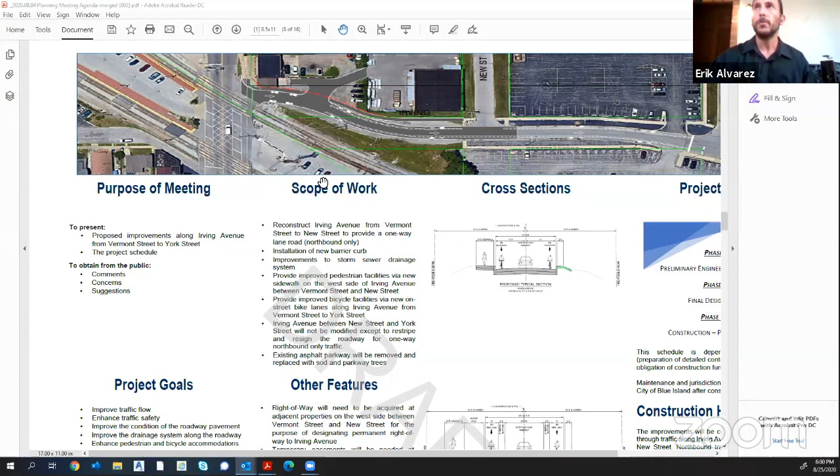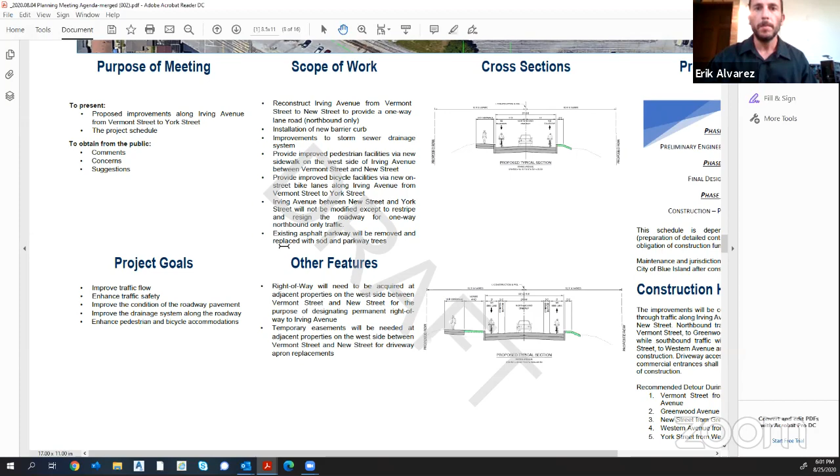This is an electronic meeting due to the COVID-19 crisis, so we've extended the comment period 5 days after this meeting to allow anybody who has questions to email the clerk, Randy Heuser, and we will answer any questions or address any comments sent within 5 days. So I'm going to run through the scope of the work and the goals of the project, one at a time. Again, if there's any questions or comments, they can be emailed to Randy Heuser within 5 days after this meeting.

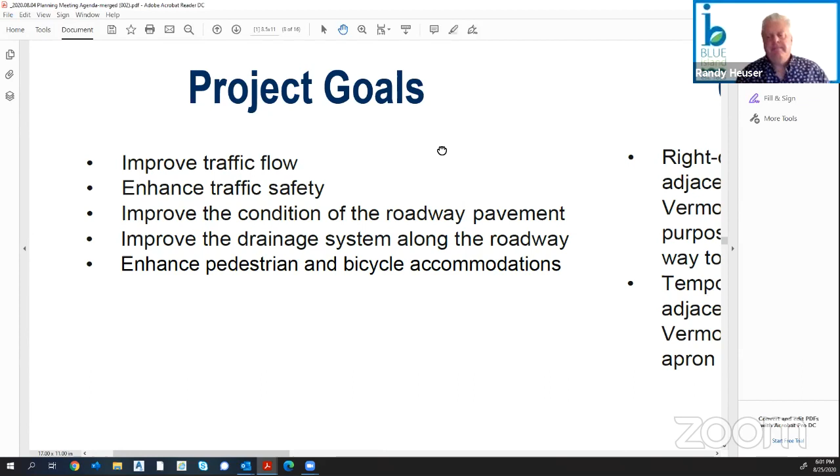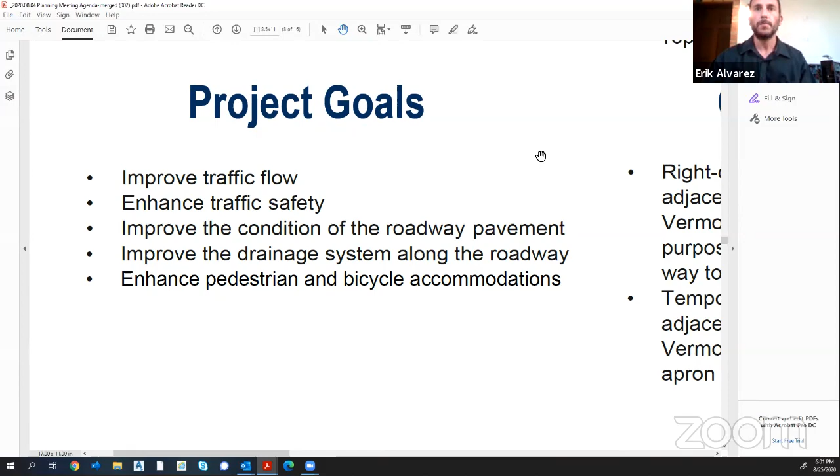So the goals of the project are, can you all see my screen share okay, Randy? Yeah. Okay, great, thanks. The goals of the project are to improve traffic flow, to enhance safety especially at the intersection, to improve the condition of the roadway pavement, which is heavily deteriorated, and enhance pedestrian and bicycle safety due to the lack of sidewalk and/or any bicycle lanes on Irving Avenue right next to the Metra.

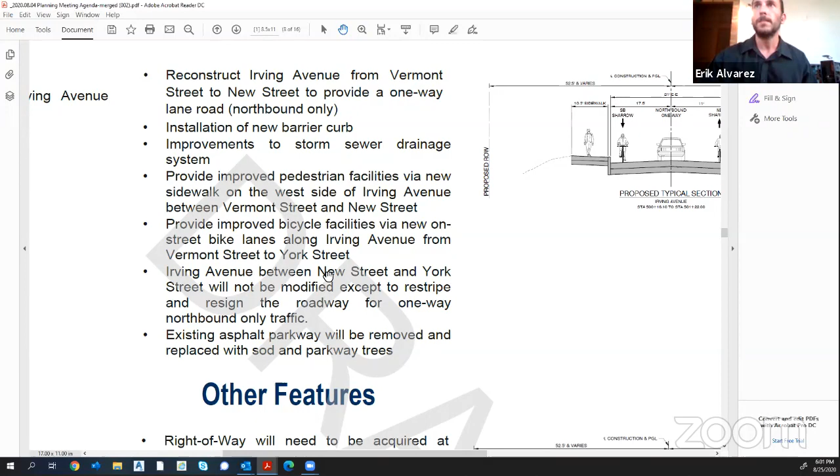The scope of the work is to reconstruct Irving Avenue from Vermont Street to New Street and provide a one-way road, northbound only. The reason for the one-way road is due to the narrow intersection at Vermont Street and the need to fit both a roadway and a sidewalk there. We'll be installing new curb, new sidewalk, new bicycle facilities, including shared lanes and dedicated bike lanes where the width allows. That's between Vermont Street and New Street.

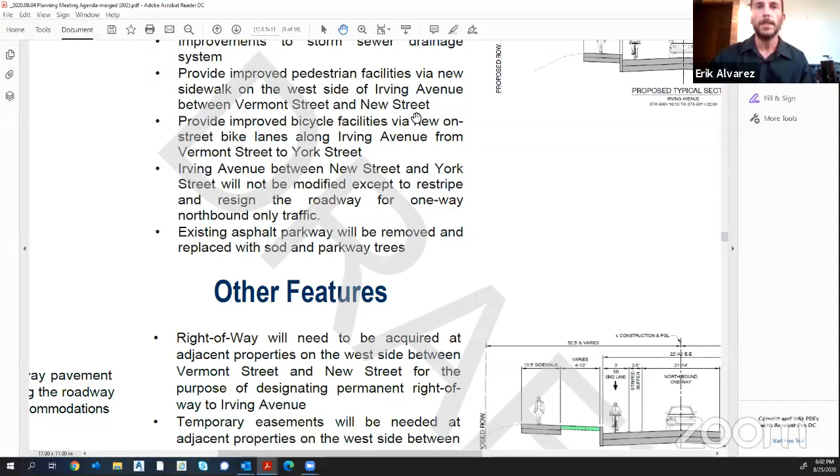In between New Street and York Street, we'll be doing parkway improvements to remove the asphalt parkways, landscape and beautify them with new trees, and we'll be restriping it for one-way northbound.

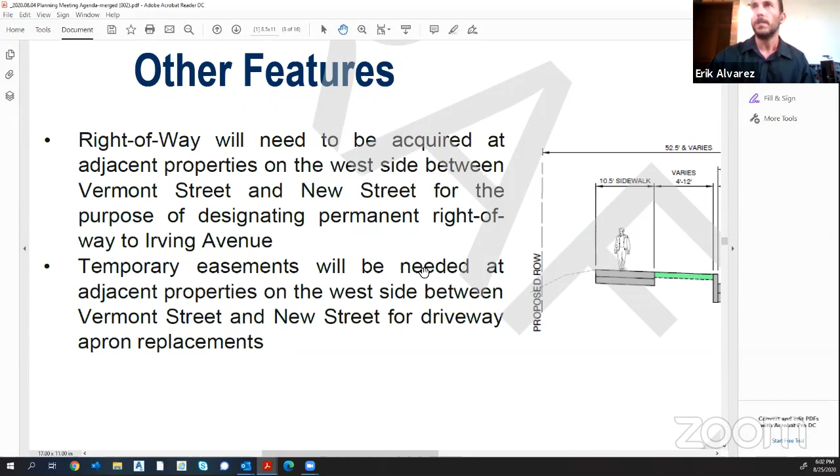For this project, right-of-way, that is property acquisition, will need to be acquired at adjacent properties on the west side between Vermont Street and New Street. Further on in this presentation, I'll show an aerial view with the expected right-of-way and property needs for the project. Again, any comments can be emailed to the clerk after the meeting. Temporary easements, that's temporary property acquisition, will also be needed to construct the project on the west side between Vermont Street and New Street for driveway replacements.

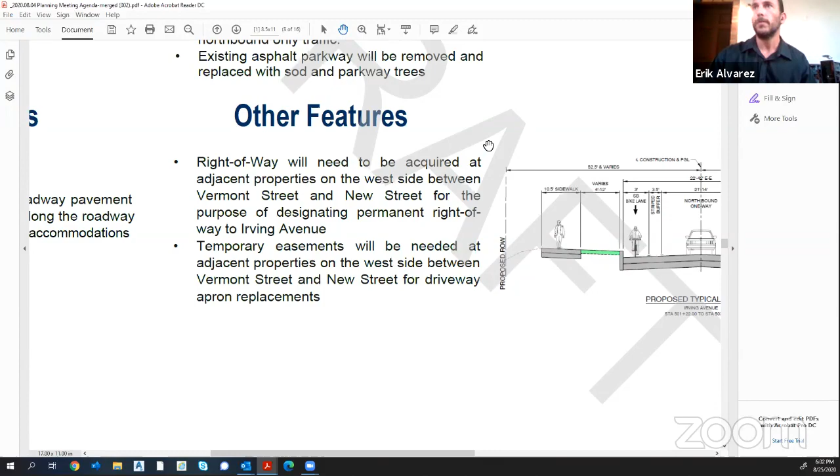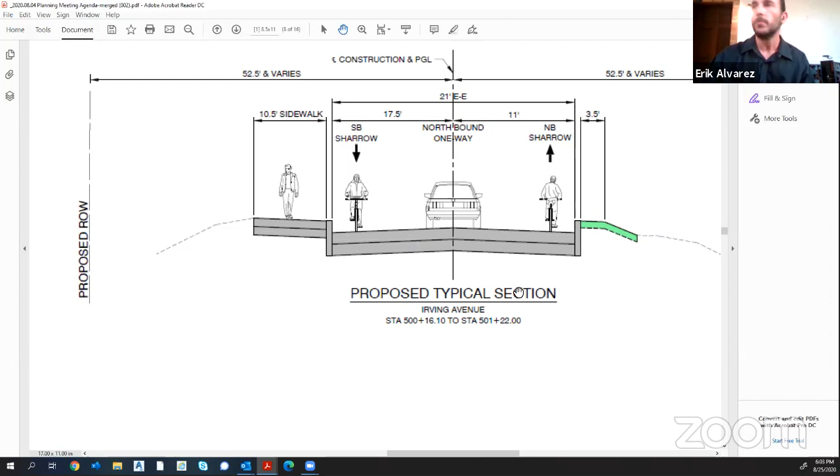I'm going to quickly go through what the new roadway is going to look like. We have one-way northbound traffic. We have southbound and northbound bike lanes or shared lanes, depending on the width of the roadway. And then we'll have a sidewalk on the west side, which will connect, whereas previously it's unconnected between New Street and Vermont Street.

North of that section, we'll have a little bit more parkway, but the setup's essentially the same with bike lanes, northbound traffic, and a sidewalk with a little bit of a parkway here because the width is wider.

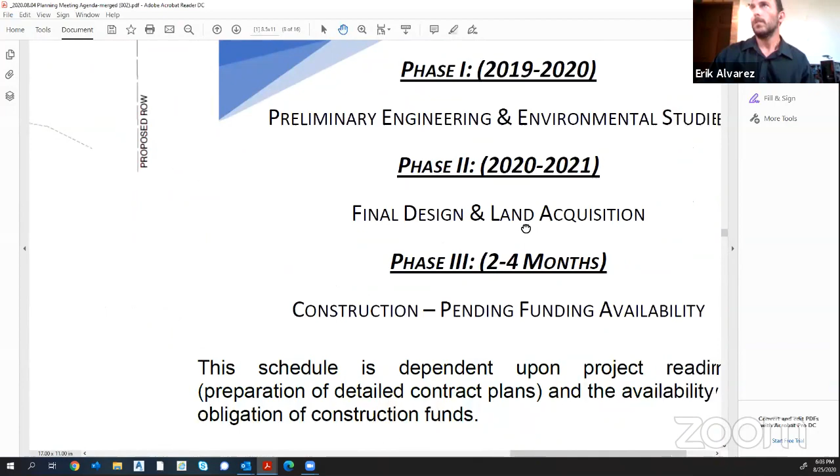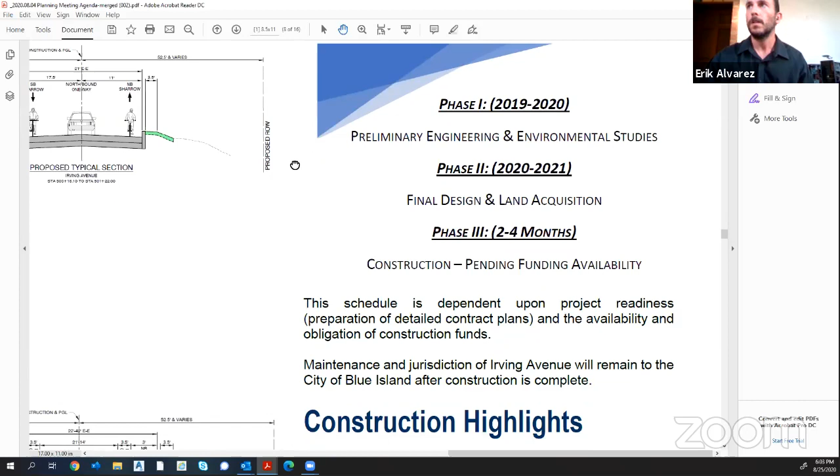The project schedule, this is a federal project, so the schedules can be fairly drawn out, and this is an estimate as this project requires right-of-way or property acquisition. These are estimates only, but we'd be hoping to finish phase 1 this year, phase 2 next year, and phase 3, which is construction, will take between 2 and 4 months. So the schedule heavily depends on the acquisition of the property and concurrence from the Illinois Department of Transportation.

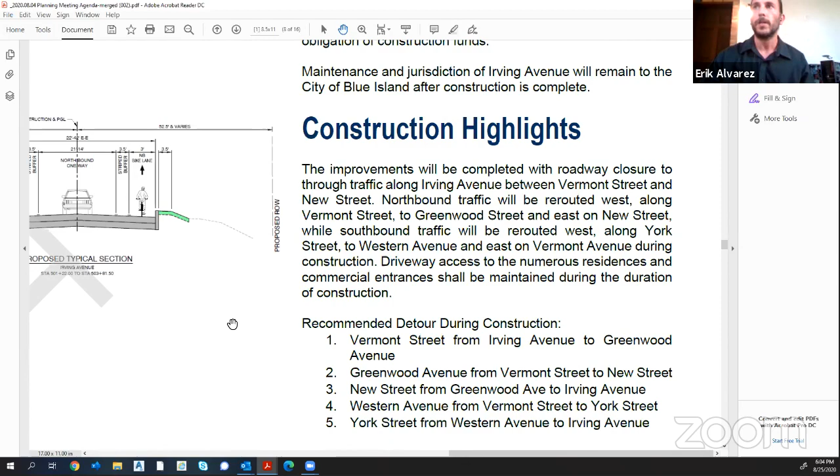So the goals of the project will be to reconstruct Irving Avenue. One of the things we wanted to point out is there will be a detour in place during construction because of the narrow width of the roadway. The road is expected to be completely closed during construction, I'll show you the map of the detour later, and that will get further reviewed by IDOT as the project goes along.

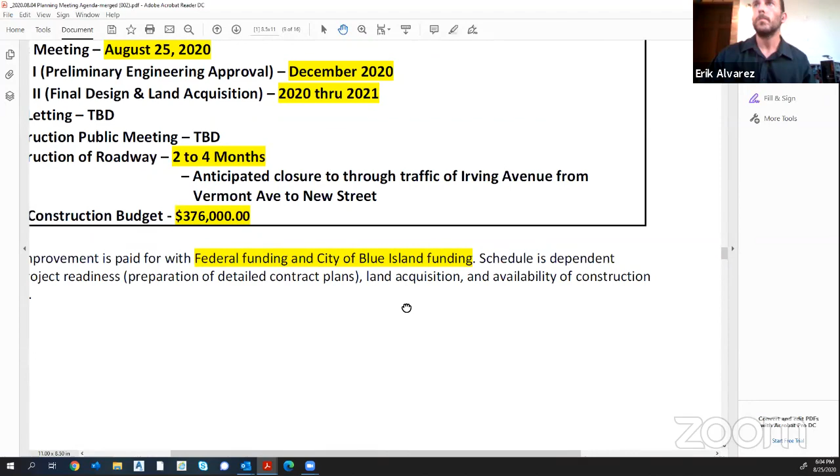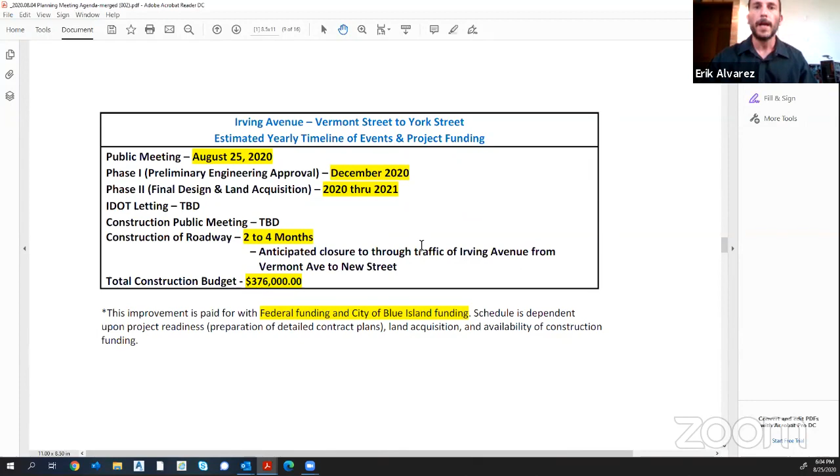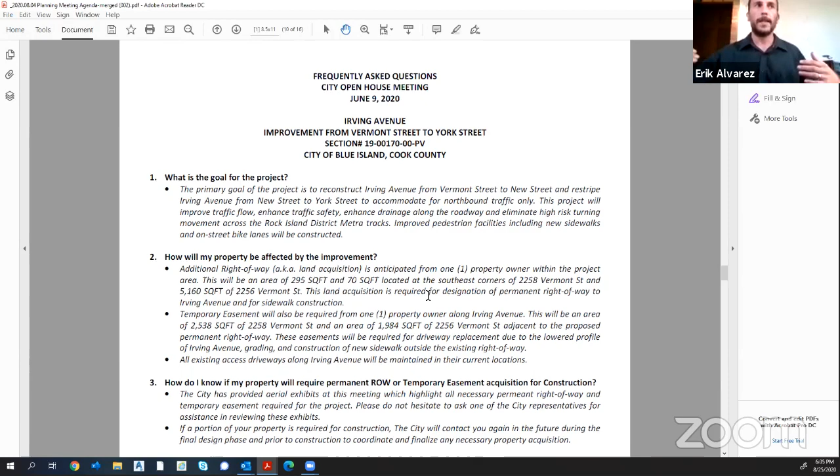Some frequently asked questions. The goal of the project is to reconstruct Irving Avenue between Vermont Street and New Street. Basically, we're trying to make the intersection safer. There's some issues with the gates. Southbound traffic can approach on Irving Avenue and not even encounter any gates before the Metro track crossings, and we're trying to eliminate that movement to make it safer for motorists and pedestrians too, because currently there's no bicycle or pedestrian facilities, which forces people out onto the road at the intersection right next to the train station.

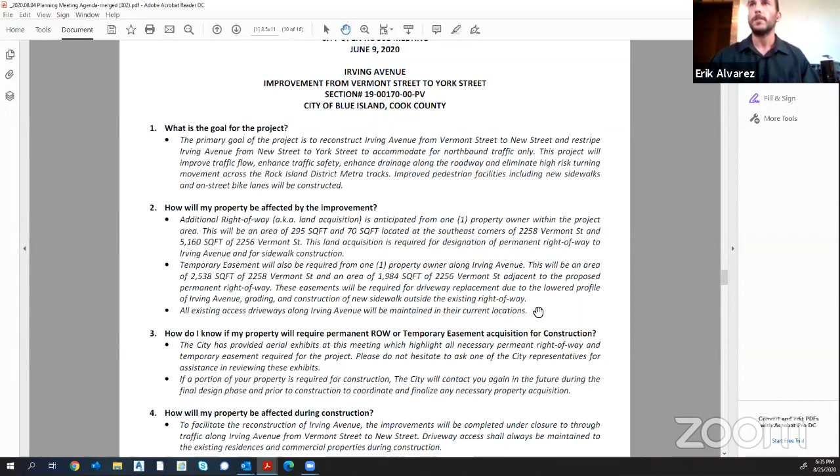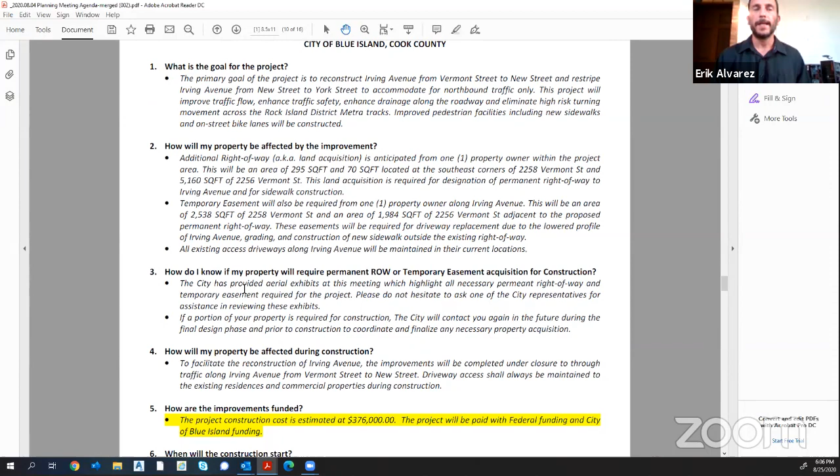Next question: how will my property be affected by the improvement? We're expecting property to be needed on the west side for construction and for permanent facilities, so for the sidewalk, basically on the west side. This isn't expected to have any real impact on any of the structures, but property will be required to be bought for this project. Okay, so we're going to go through aerial exhibits.

How will I know if my property will require any permanent right-of-way or temporary easement for construction? We'll go through some aerial exhibits later, and you'll see the affected properties. We also did mailings through Robinson Engineering and the clerk's office to all the affected property owners and all the affected agencies, as this is right next to the Metra tracks. So all the affected property owners should have got a letter in the mail already with all of these details, but we'll also show you them later here.

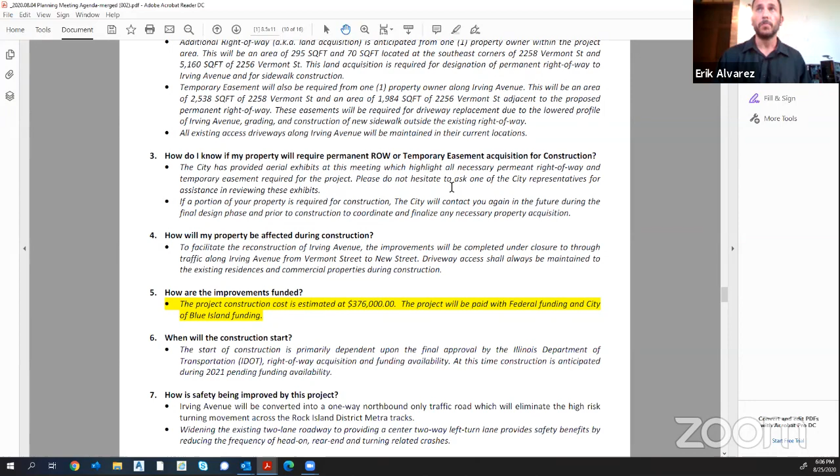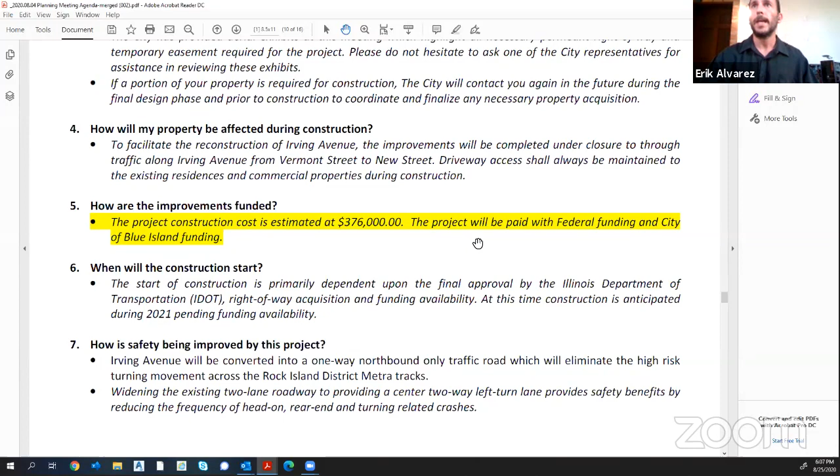These improvements, as we spoke of before, the construction cost is expected to be around $376,000. The project will be paid for with Federal Highway Administration funding, RTA funding, and City of Blue Island funding. Construction timing will be starting depending on the approval of engineering phase 1 and phase 2. So we're hoping for construction following phase 1 in 2021, 2022.

How is safety being improved in this project? Number one, we're trying to eliminate the crossing movements across the Metro tracks that are not currently protected by any gates. Number two, we're trying to improve safety for pedestrians by providing them a dedicated sidewalk and bike lanes and/or shared lanes, so they have a dedicated area right next to this train station too.

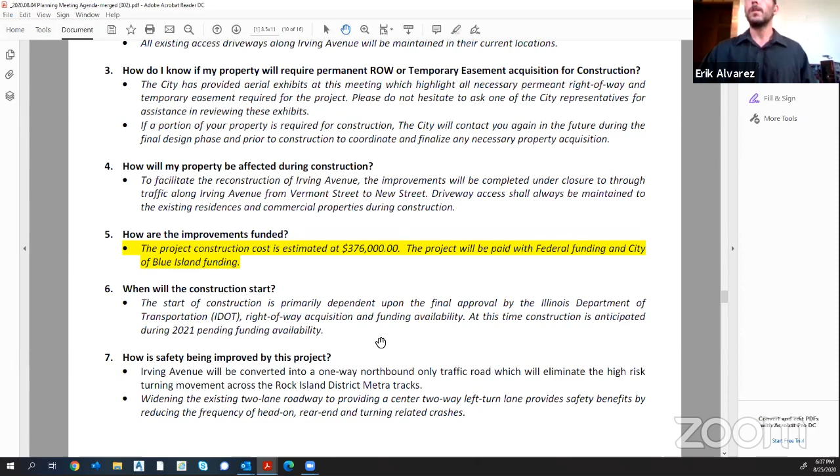Why are on-street bike lanes proposed along Irving Avenue instead of a separate shared use path? By shared use path, we're talking about a wider asphalt bike path that people may have seen along the Cal-Sag Trail recently constructed, or along Canal Street, just south of the Cal-Sag Channel. The reason why we're doing bike lanes here is basically because of available space. Anybody familiar with the area will know that it's a very narrow roadway, especially right at the intersection of Vermont Street and Irving.

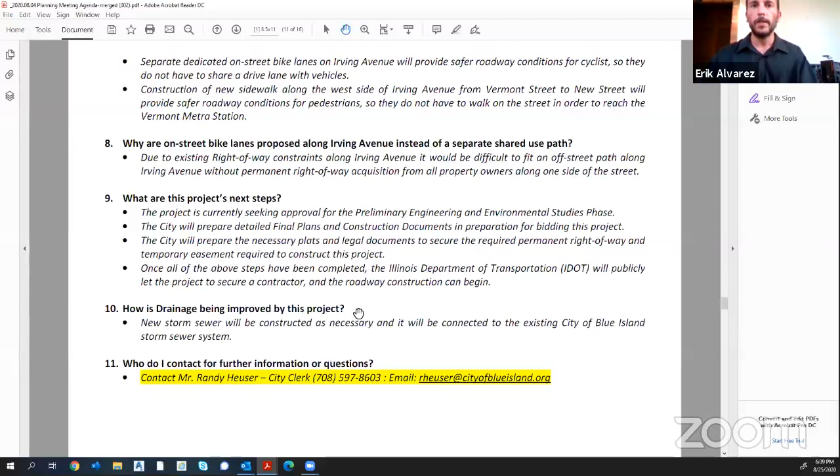What are the next steps? This meeting is one of our prerequisites for getting phase 1 design approval from the Illinois Department of Transportation, so we're seeking approval for preliminary engineering and environmental studies. We'll be preparing a set of detailed plans and construction plans during phase 2, and then we'll be preparing with the city's real estate attorneys the plats of highways and all the legal property documentation needed to acquire the properties needed for the project.

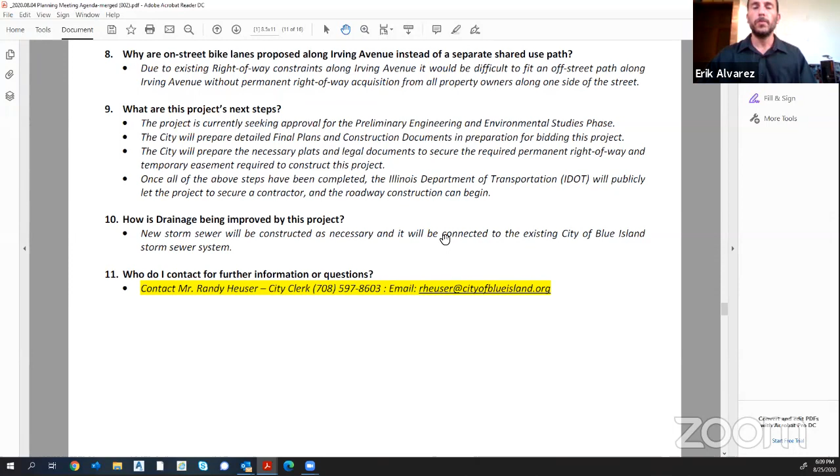Drainage will be improved by the project, number one, by constructing new storm sewer, and number two, by constructing curb and gutter. If you're familiar with the roadway, it currently just has aggregate shoulders, so stone shoulders, but we're going to upgrade that to concrete curb and gutter.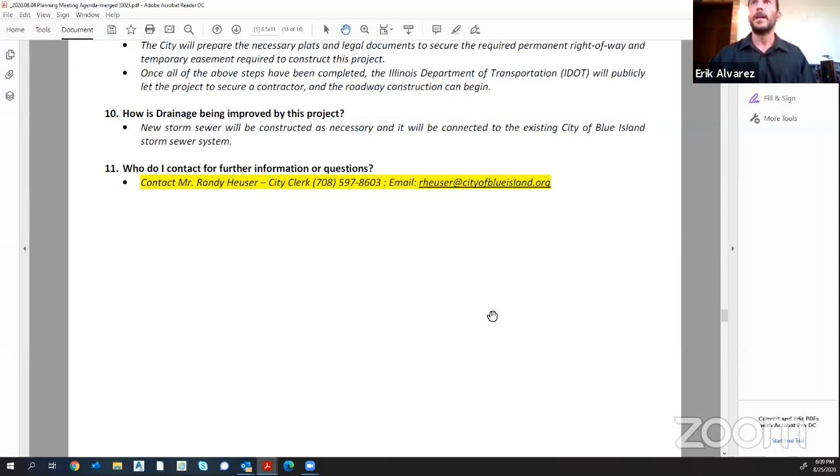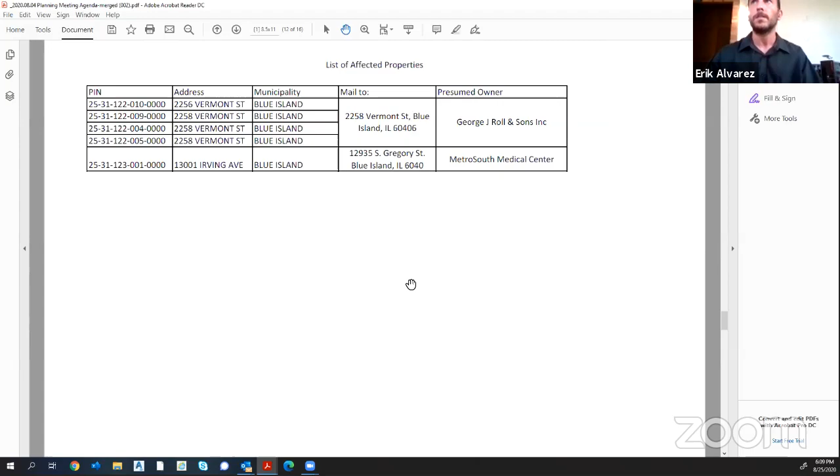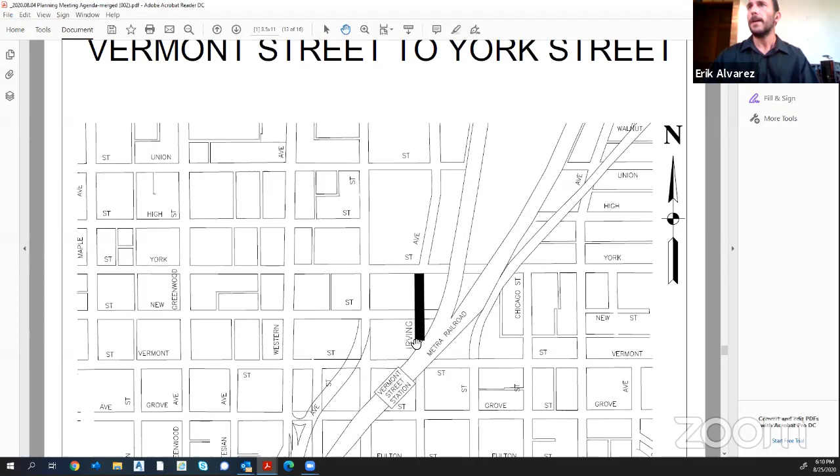This is just a location map of the project. We have the Metra Railroad to the south, the Vermont Street Station. This is Irving Avenue, Vermont Street, New Street, and York Street. So, location of the project.

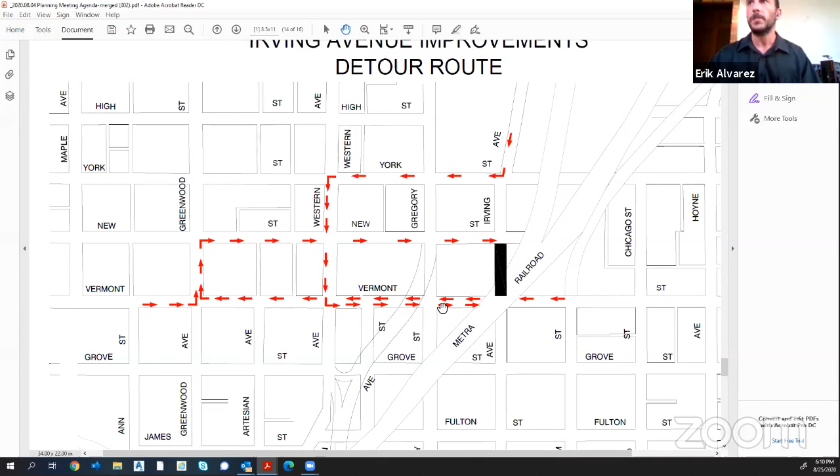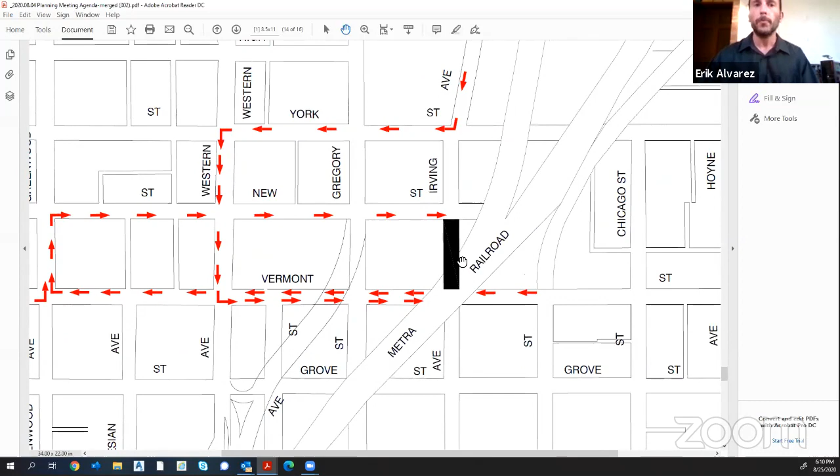This is the detour route. I'm not going to go into it in great detail here. This still gets subject to IDOT approval during phase 2: number one, to approve all the signage and details of the detour route, and number two, because during phase 2 they'll make sure this is coordinated with any adjacent construction. For example, if this were to happen this year, they would want to coordinate with the Western Avenue Bridge replacement. But the main takeaway is that the roadway is expected to be closed during construction due to the narrow width.

You see there's one-way northbound traffic, and shared bike lanes at the narrow intersection. We have a crosswalk here for pedestrians, and a connected sidewalk running on the west side of Irving Avenue. Once the width allows, we will have dedicated bike lanes as well.

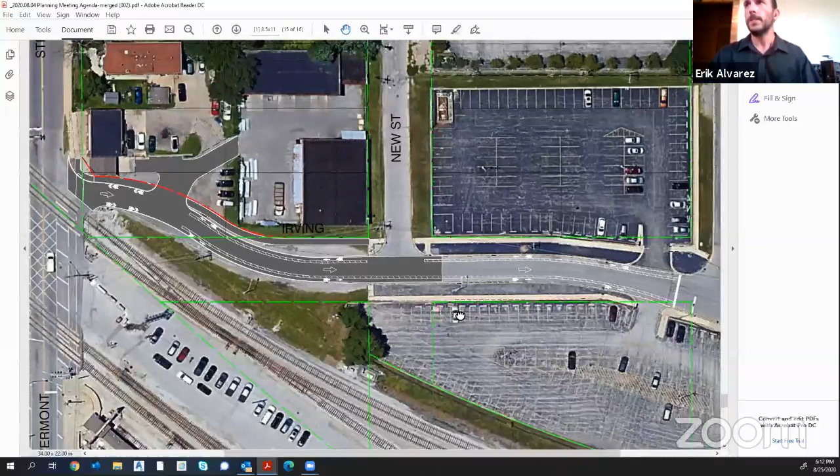As detailed in this pavement exhibit, the reconstruction is going to stop just north of New Street, where the roadway is in much better shape, and it will just be a matter of restriping to allow one-way traffic and bike lanes to York Street. All the signage will be changed along York Street to show that you can't turn southbound onto Irving, and everything will get restriped at the intersection.

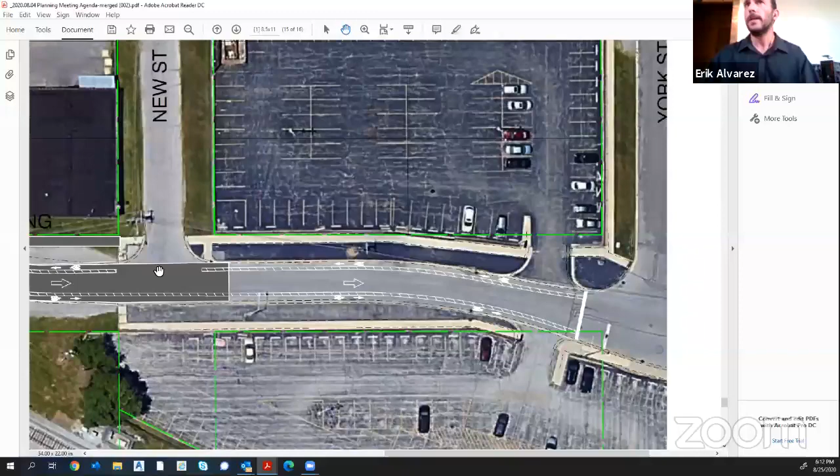These asphalt parkways will be torn out, landscaped, and trees planted to add to the appeal of the area, including the no man's land here, what's gravel shoulder now.

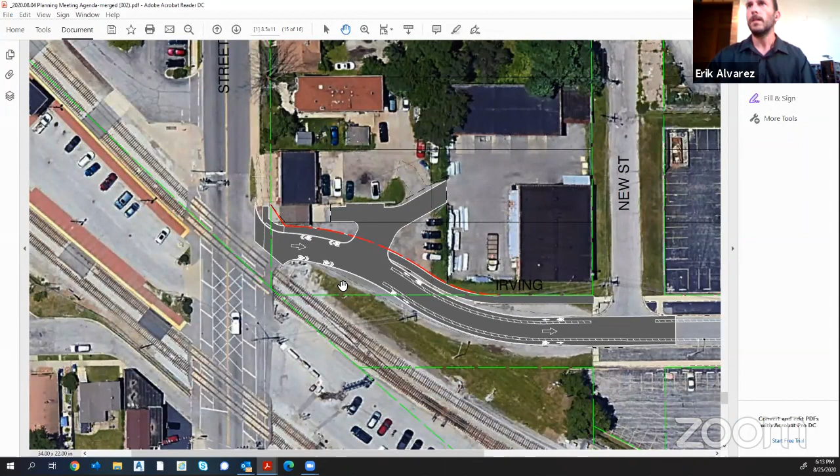I want to make sure I show everybody here what we're looking at now - these green lines are the property lines for the roadway. Irving Avenue, which used to be called Wabash Street, I believe, used to run directly east and west. This swoop, this set of double curves that brings the roadway to the west, is a newer addition. Survey records don't actually indicate that this was ever dedicated for a highway. So if we cannot find the survey records, and Metra does not have the survey records dedicating this as a public highway, dedicating this will be part of the project.

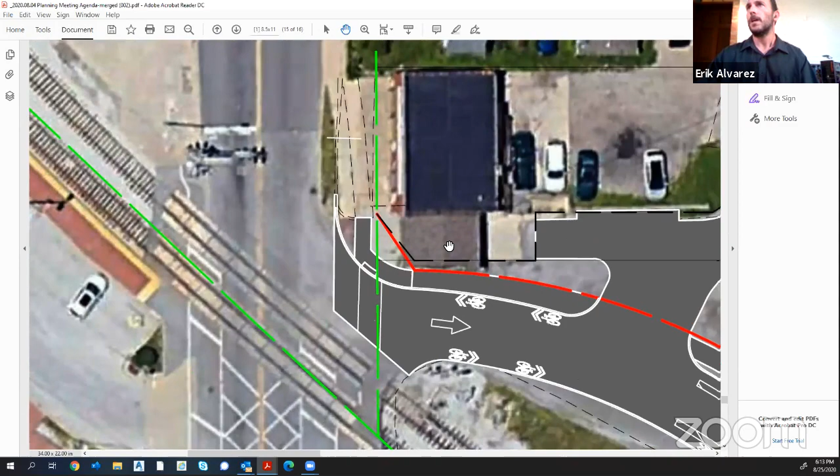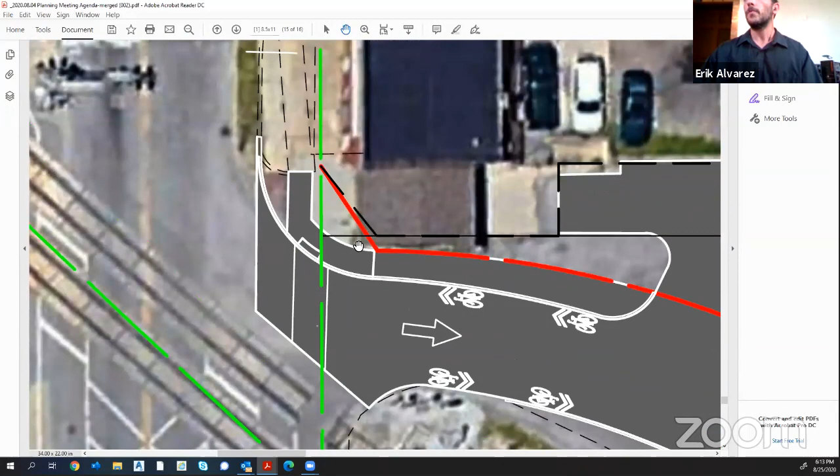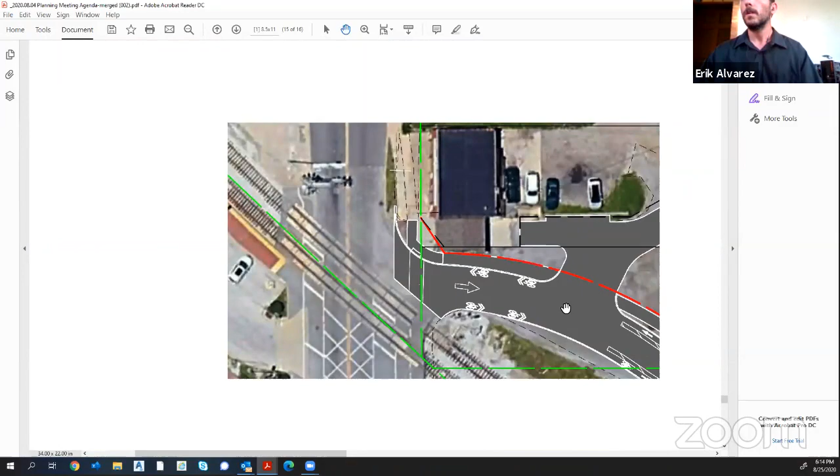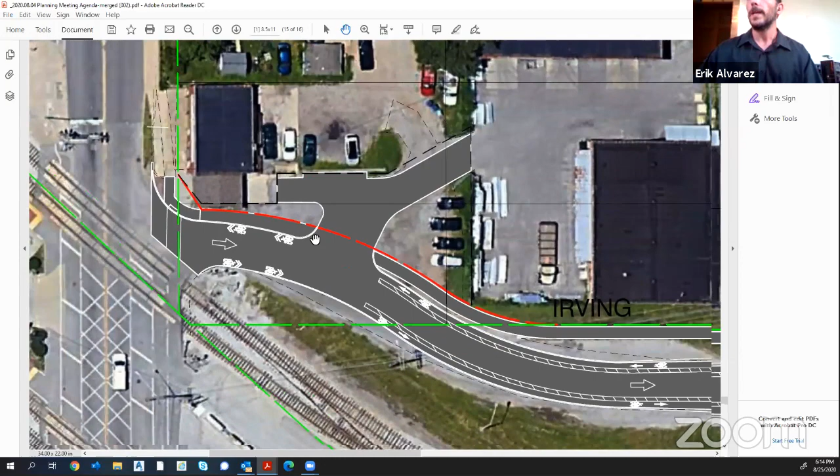We should also show here, this is a construction material supply company - I believe it's called George Rowland Sons. We will be requiring a sliver of the property here. This is a crude diagram, but in order to construct this sidewalk, we'll be requiring a bit of this property to actually construct it. These temporary easements shown here are to construct the driveway. Since this aerial and exhibit were made, I know this has been paved, so this is going to be modified somewhat during phase 2, but I think it's good enough as a description of the project.

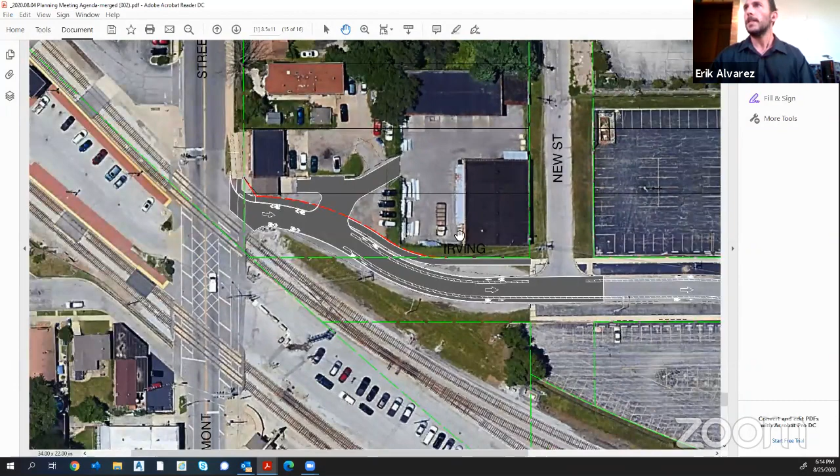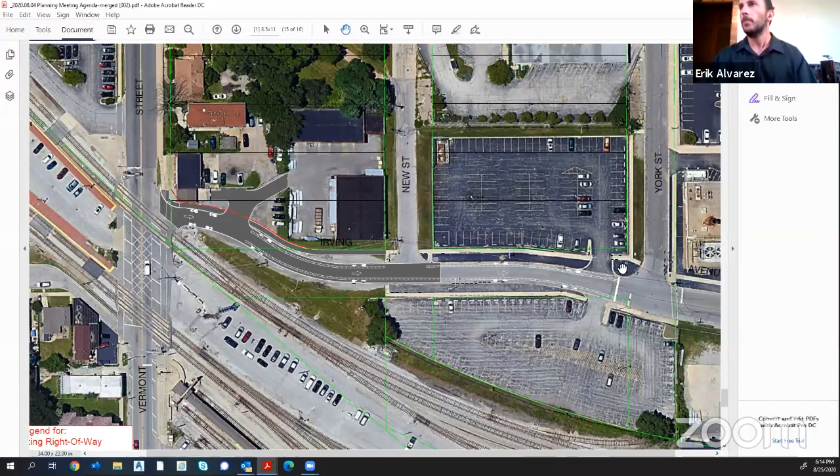Okay, so I'm just going to zoom out once again so you all can get an idea of the overall project scope, which is between Vermont Street and York Street - reconstructing between Vermont Street and New Street, and restriping and posting new signs, beautifying the parkway between New Street and York Street.

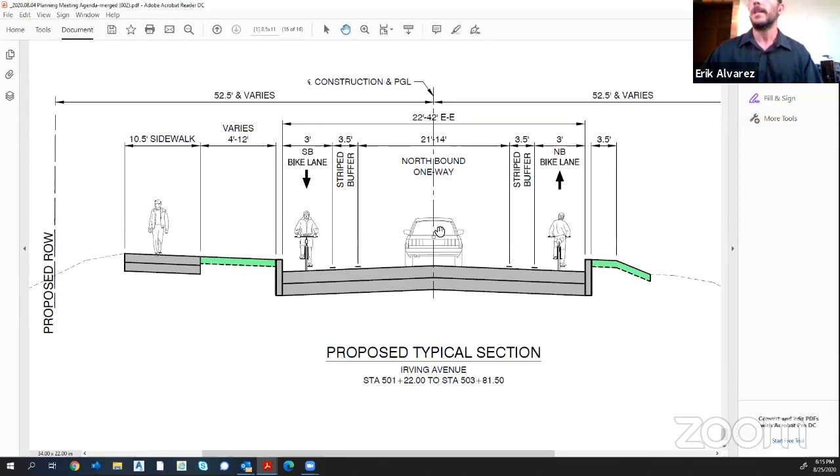This again shows the typical sections for the project showing northbound traffic, bike lanes on either side, and a sidewalk where there previously wasn't one. These are dedicated bike lanes. So once the roadway widens out just north of the intersection at Vermont Street, there will be dedicated bike lanes with the stripe buffer.

And that's it - that's the basis of the project. We're hoping to get phase 1 design approval before the end of the year and to keep it going. Again, if there are any questions or comments, feel free to email us, call us, or send a letter. We have 5 days for this to become official public record in these meeting minutes, but even after that period, we would always want to hear the public opinion on the project. We are excited to get this going and think it will be a great improvement, both for safety and utility at the intersection. So, Randy, that's about the end of the presentation.

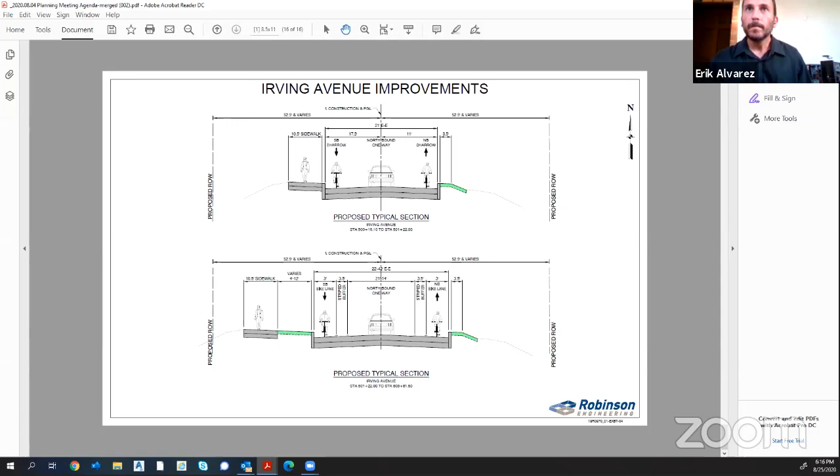I might give you back control. Okay, okay - if I can figure out how to do that. And I think you should have it now.